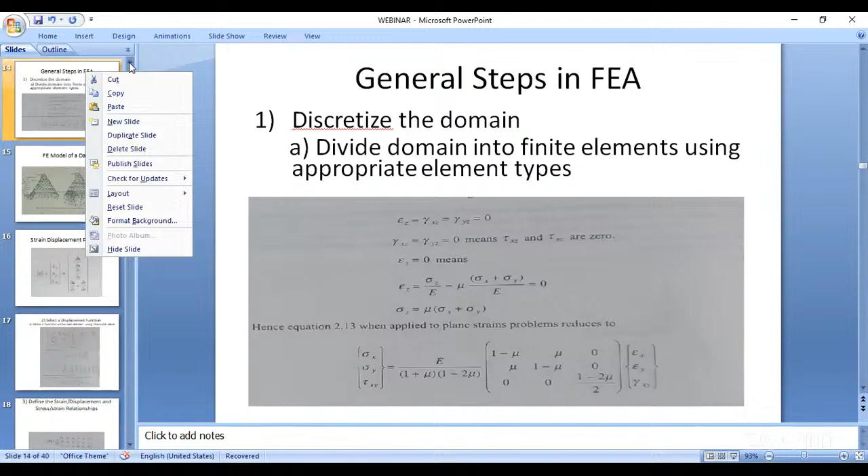Your slides are not moving, sir. Is it okay now, sir? You move it, sir. Let's try again.

Is it visible now, sir? Introduction, okay, you can start from here. So it's okay.

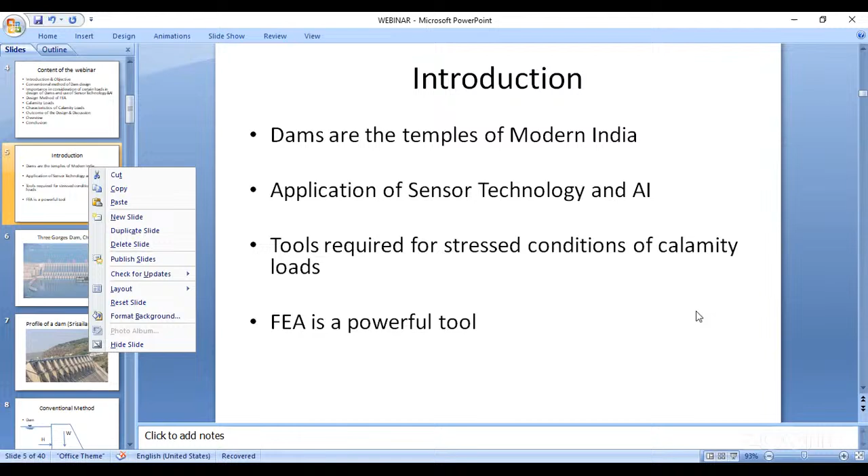Former Prime Minister of India, Jawaharlal Nehru, who is also regarded as architect of modern India, said dams are temples of modern India. We are getting our bread and butter now because of dams and irrigation projects. So we have to take care of dams, and when going for new constructions, we must consider the possibility of using emerging technologies like artificial intelligence or sensor technology. My seminar will touch on various aspects of implementing AI and sensor technology, not only for construction of dams, but also for the safety, stability, structural behavior, and maintenance of dams over time.

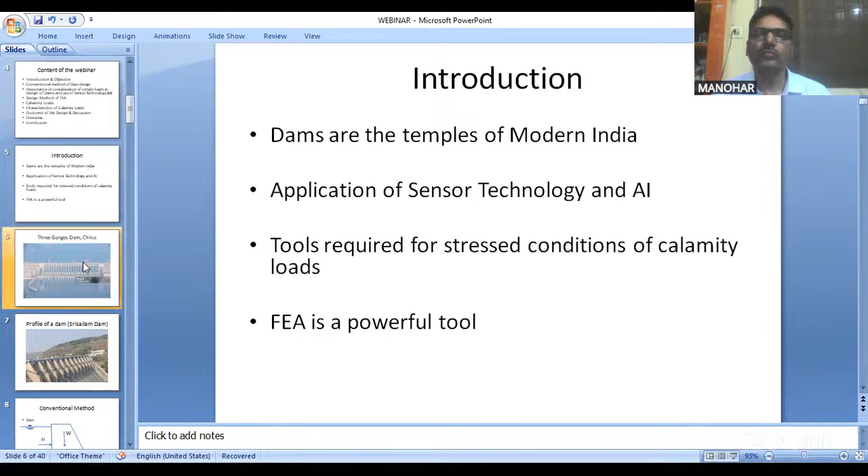So this is the Three Gorges Dam of China. The profile, you can see the profile, the huge amount of water body. There is a saying that if you release the water at a time, it reduces the rotation of the earth by microseconds.

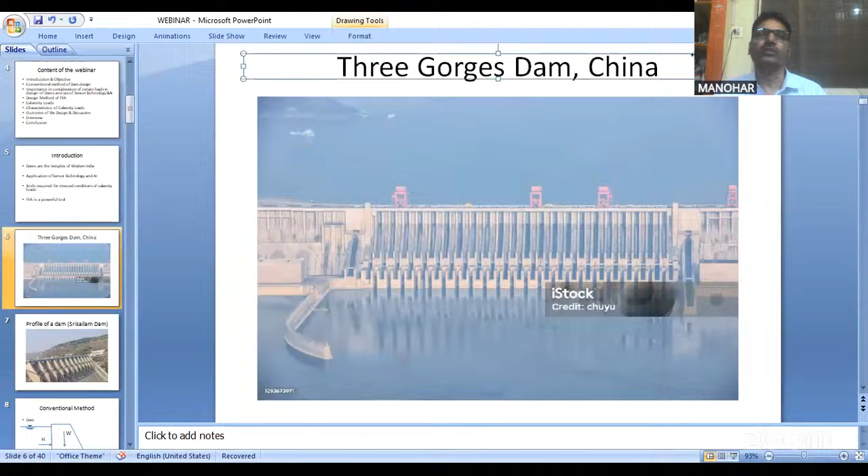Then you have the Srisailam Dam. See the profile of the Srisailam Dam.

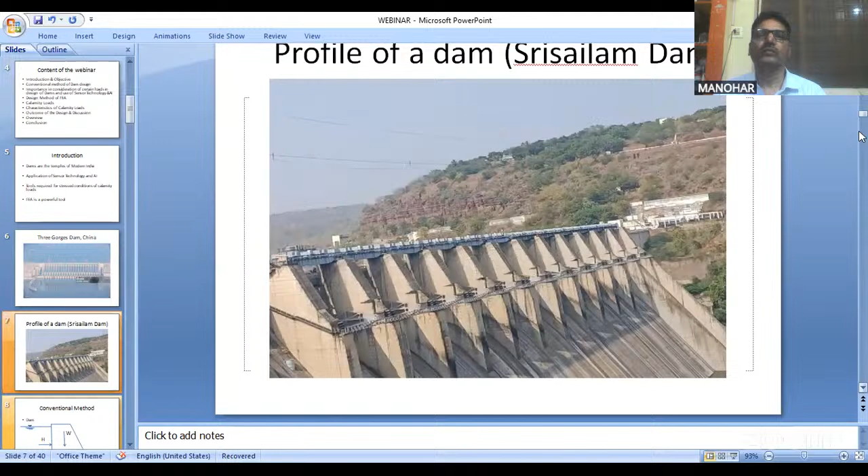Coming to the conventional method, before we were studying at the undergraduate level, dams are designed not for all the elements of the dam or what we are going to choose in finite element analysis. In the conventional method, we check randomly where we expect the maximum stresses in the dam, such as the uplifting pressures. We identify where the maximum tension is going to occur in the dam, and then we go for the factor of safety for sliding of the dam, and then overturning of the dam, where you get the maximum bending moment causing the stresses. So these are considered for designing the dam. Now we require to study

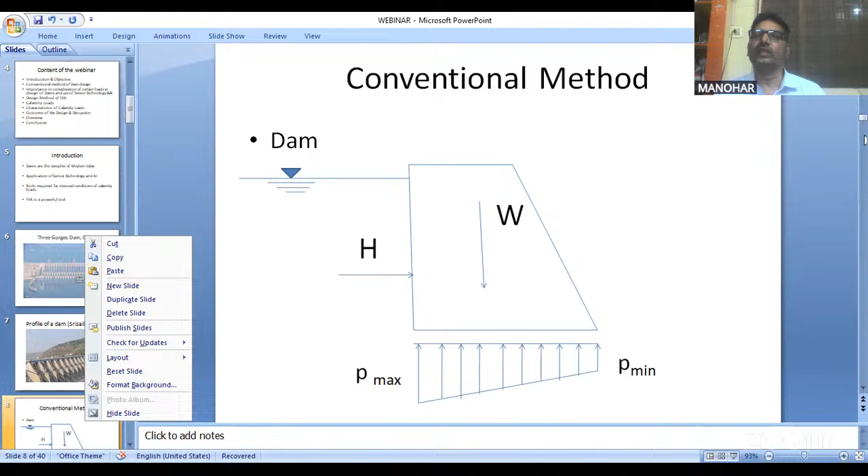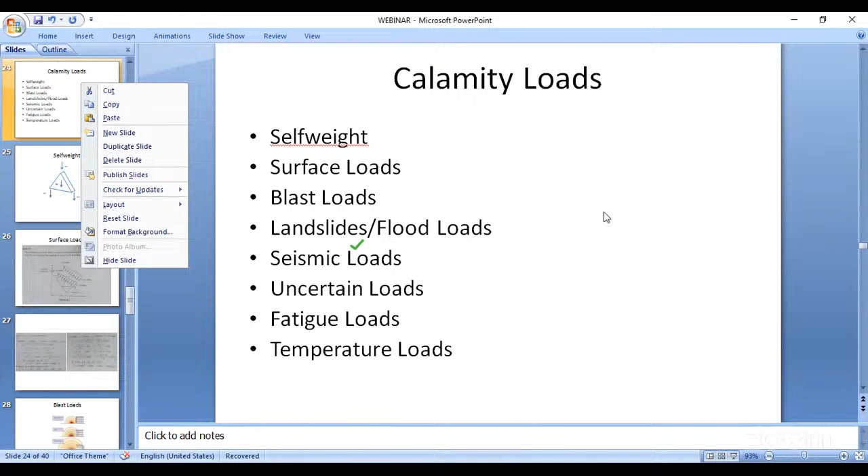Okay, now it is visible, sir. Now the slides are moving, calamity loads is showing now. Yeah, calamity loads. So our aim is not to simply take the loads as general loads. We have to go beyond that. So in order to apply AI or sensor technology, if the stresses are within limits like the conventional method, you need not have any alerts.

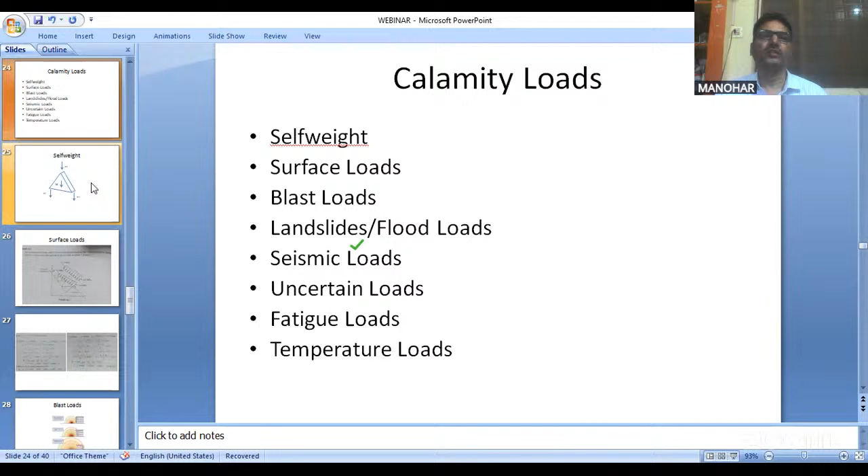When the loads are moving beyond certain limits, like blast loads, landslides, flood loads, seismic loads, fatigue loads, sometimes temperature loads, the stresses become alarming. So you can get the signals so that you can take action. So basically there are different types of calamity loads. The self-weight is a standard load we have to consider. It depends upon the material you have used.

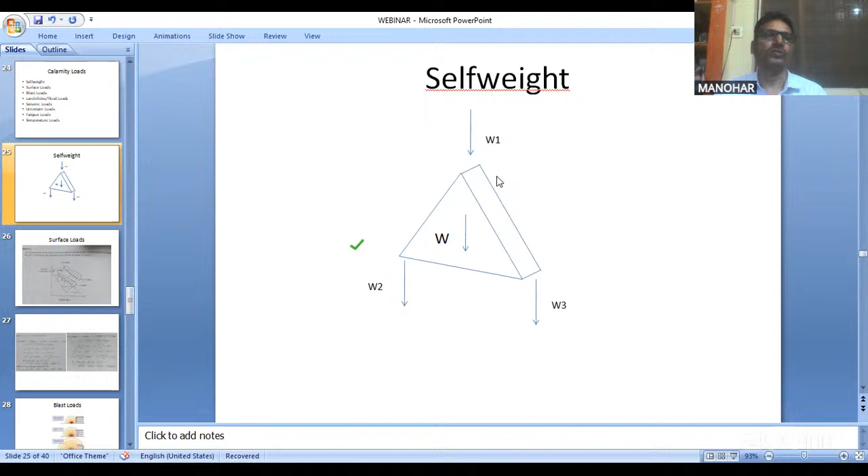The load will be divided by how many joints, how many nodes we have: W divided by the number of nodes. Then we have surface loads. For surface loads, you need to calculate the load in the X direction and Y direction caused by the surface tractions. Surface traction forces are due to hydrostatic forces. Their components are taken by means of the direction cosines. Direction cosines are the cos values of the angles made with the x-axis, y-axis and z-axis by the surface traction forces.

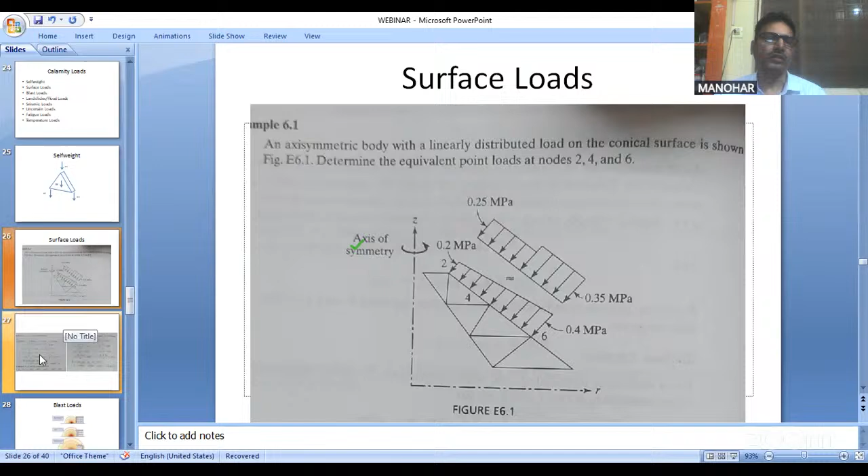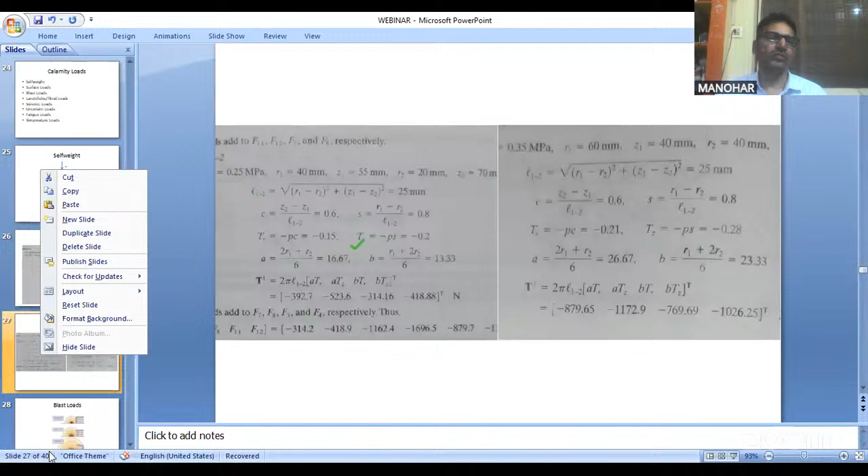So this is the calculation I want to show you. The simple calculation: the length and the deviation from the x-axis, y-axis, z-axis. Deviation divided by length itself gives the cos theta. These direction cosines are considered for the surface traction forces in the x, y, and z directions. So this is the calculation I made. These are the forces for a constant force of 1000 kN in the x, y, z directions. So in addition to self weight, you will superpose the surface traction forces, in the nodal directions, the degrees of freedom at the nodes.

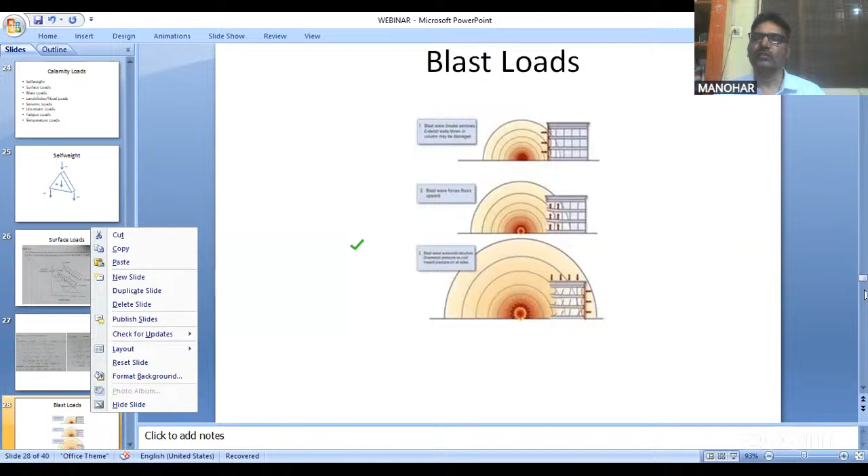So we have other types of calamity loads, like blast loads. Blast load characteristics depend on the height of the structure from the source of the blast. You have to consider not only the incident waves coming from the source of the blast, but also the reflected waves coming from the ground. No doubt the incident waves will be stronger than the reflected waves, but I need to consider the reflected waves also for the dam. Generally these loads are considered by means of the Mach stem. The Mach stem is the projected effect of the blast pressures on a vertical plane, taken as the loads on the dam.

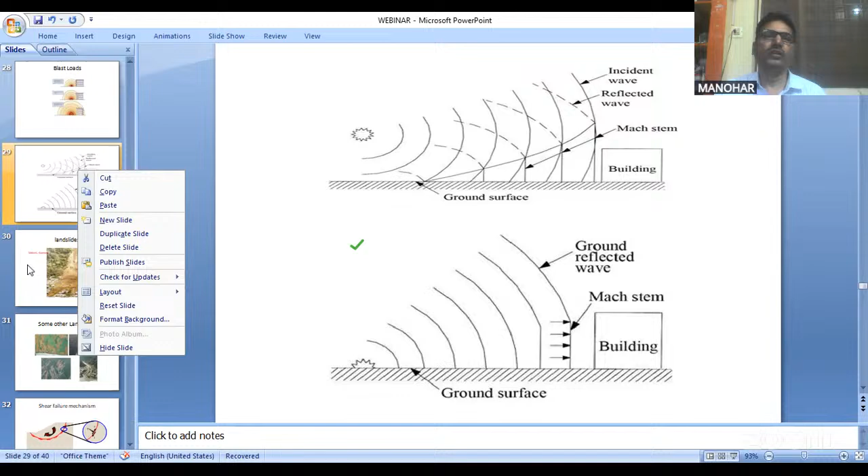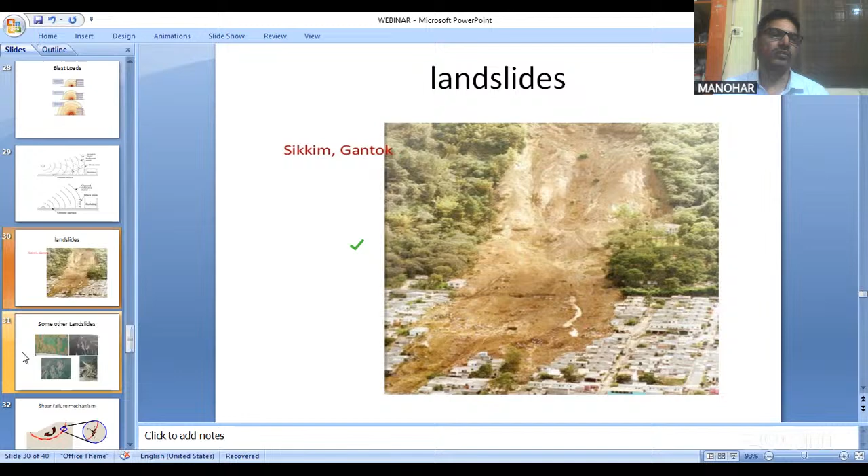The intensity of these blast loads will be considered in terms of TNT, the blasting material. The intensity of 2 TNT is 10 times greater than 1 TNT, so it's an exponential scale, and it gives the pressure on the vertical face of the dam that will be converted to loads on the nodal points of every element. Then we have other types of loads, like landslide loads, especially for embankment and gravity dams. The problem is the massive load: the mass of the entire earth is going to act suddenly on the dam, which is hazardous for the dam.

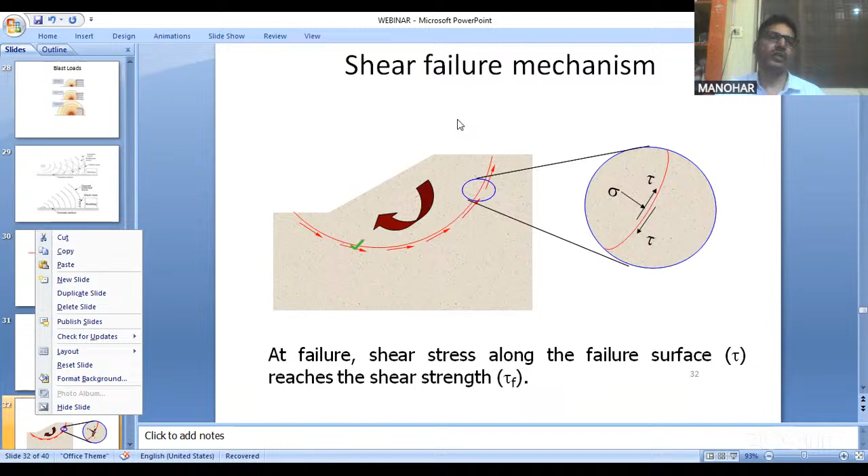So those loads must be considered. So generally the shear failure mechanism is considered for the stability of the slopes, especially for earth dams. We need to consider the slip circles, find out the shear failures, the normal stresses and shear stresses, and according to this, loads must be given to this model of the dam. So these are the other types, a number of landslides caused in hill areas.

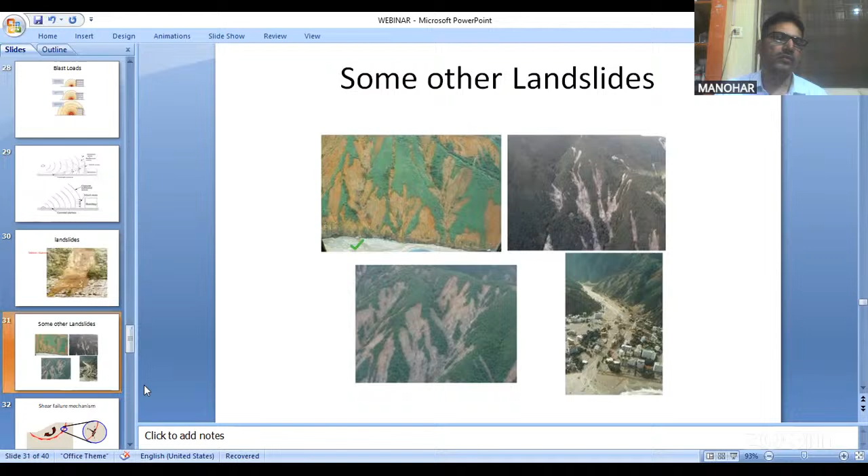Then we have seismic loads. Our country is divided into 5 zones according to the intensity of earthquake-prone zones. We come under zone 2; earlier it was zone 1. But we need to do this analysis of dams considering the maximum possible, even the 5th zone. So we need to develop an artificial intelligent system such that whatever the intensity of seismic loads for the 5th zone, we get immediate alarms and give the alert.

And depending upon the zones we take, as we are considering the foundation of the dam and the various elements at the foundation level, we can go for the analysis of the response to seismic loads effectively, as we take the rock mechanics characteristics of the material available at the hard strata of the dam.

So stresses can be analyzed by seismic coefficients, and we can get warnings and alerts depending upon the intensity of loads we get, if it is beyond the limits. Only if the loads are beyond the limits do we require alerts. If the loads or stresses in the material are less than the limits, it is not required.

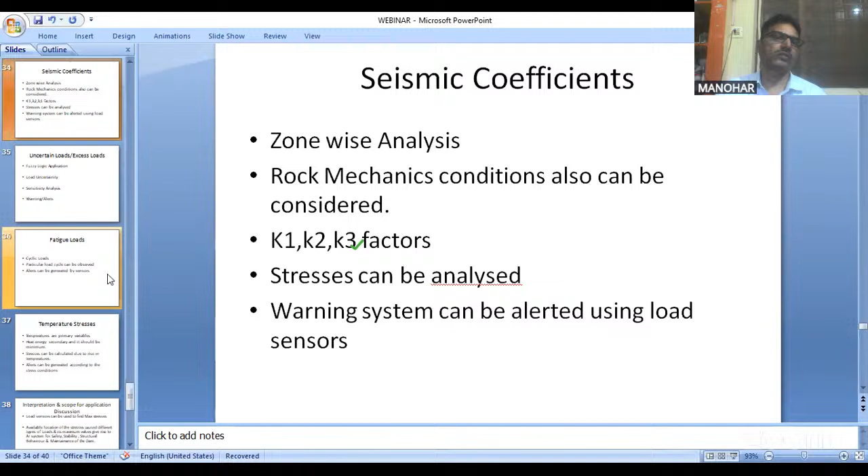Then we have fatigue loads. Fatigue loads are repeated loads. The maximum loads are going to be repeated, and that also is hazardous for the dam material. So we have to check how many cycles the loads are coming beyond the limits, and we have to get the alarm for that.

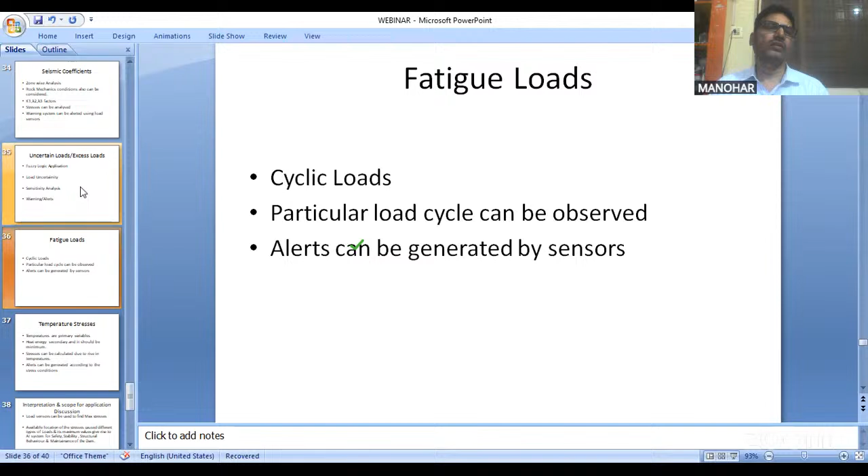Then we have uncertainty loads. Sometimes the dams will have excess loads compared to the design loads, and those are uncertainty loads. Means the design variables like loads or material or even water, if the density is more and silting is more. So we need to work out the analysis if the loads are at least 5 to 10% more or less than the design loads.

So we have to make an attempt at what-if studies also, even if it doesn't happen actually. What-if studies are required for applying the AI methods, AI systems. So we have to go for sensitivity analysis, and according to the sensitivity analysis, we can go for the alerts.

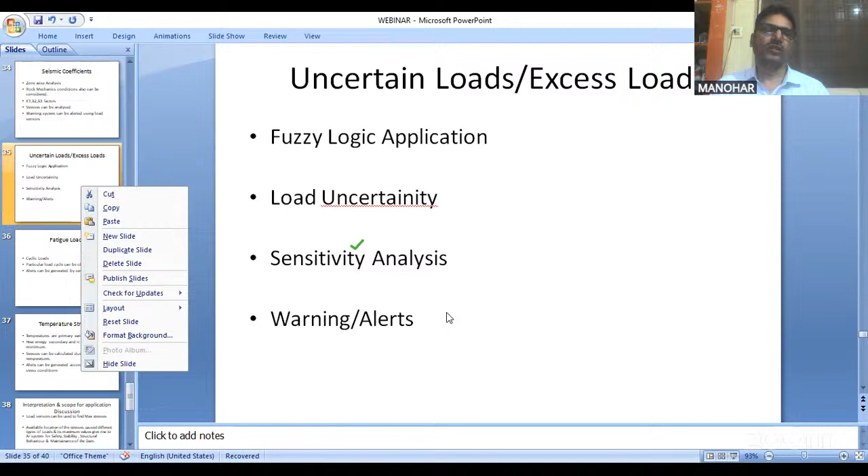Then we have temperature stresses. The variation of the temperature near the site is also very important. It causes expansions that cause displacements of the nodal points, and in turn it creates more stresses. So temperature stresses are also considered by using finite element analysis.

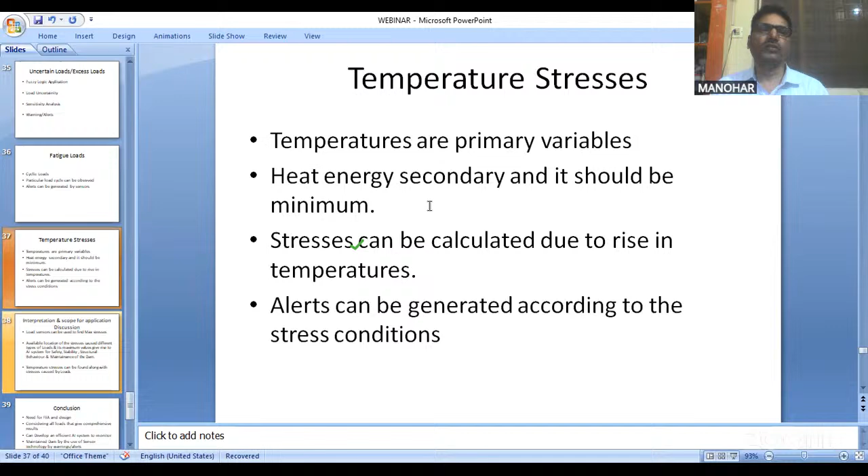The temperatures are considered to be primary variables, and the heat energy as the secondary variable. That means the functional is assumed as heat energy. According to that, we can find out the stress caused by the rise in temperatures. So all these loads must be considered for generating the analysis of the entire dam, and according to the analysis, we need to give the alerts.

So this is the interpretation of the scope of application. Load sensors can be used for finding out maximum stresses. At the place where you get the maximum stresses, identified with the combination of all types of calamity loads, you can provide the sensors. High load sensors can be used to get the maximum stress, and according to that, we can give the alarms.

The locations of stresses caused by different types of loads and their maximum values give rise to an AI system for safety, stability, structural behavior, and the maintenance of the dam in due course. All these what-if studies are needed for generating the database for the AI system. And not only that, temperature stresses can also be used for climate change conditions. Okay.

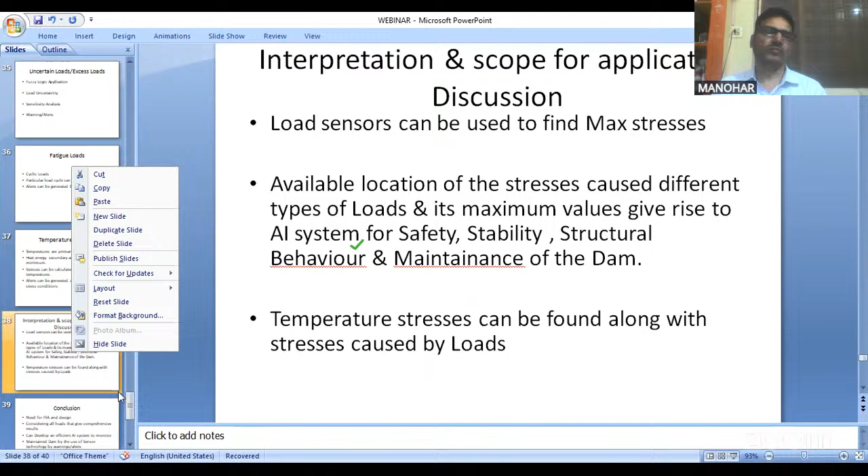So, to come to the conclusion. The FEM model is very much needed for applying AI or using sensor technology for creating warnings or alerts, and according to that, designs also must be made. Considering all loads gives comprehensive results. Taking into consideration each and every load, you can calculate the response. Similarly, with all the loads combined together, what is the response? That may help in generating the AI system for the safety, stability, and maintenance of the dam.

And so, maintain the dam with sensor technology and warnings, and sustainability against climate change is also ensured in the dam, for climatic changes like fire accidents and rising temperatures.